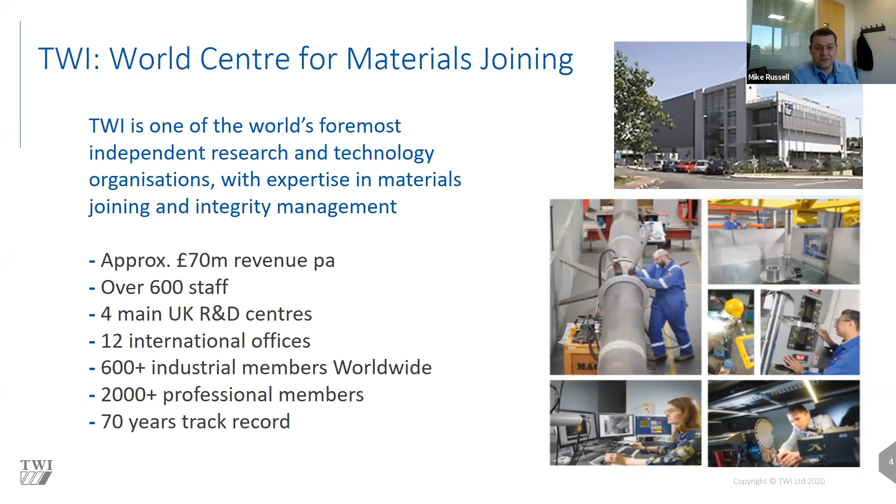Next slide, please, Jonathan. Thank you. So this slide summarizes our technical expertise across TWI. In the interests of time, I'm not going to read through all of these individual areas, but you will all receive a copy of this presentation, so feel free to have a look at this, and if you are interested in any of these areas, please get in touch.

So that's what we do. And next slide, please - that shows you who we do that for. So we are active across a wide range of industry sectors, and as you can appreciate from those images, lots of different engineering materials, different thicknesses, different scales of operation, different nations, territories, and companies. It's a very broad-based business.

Next slide, please. So friction stir welding will, of course, be familiar to many of you. I'm not going to talk through the process itself here today - if you would like more information about the base process, feel free to reach out to us or look at our website. The key point to pull out here is this technology was invented by TWI in 1991 and was actually in production use in industry within 5 years after invention. And that's quite a remarkable turnaround and implementation period for a brand new process.

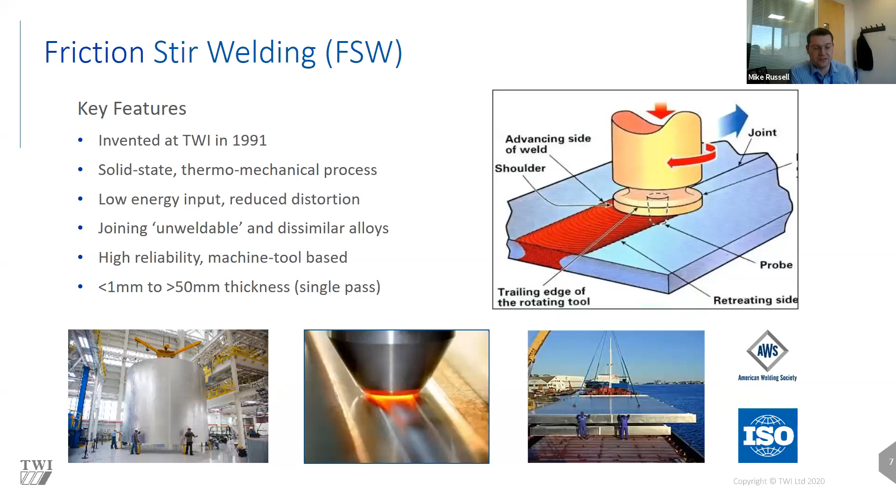Next slide, please. So one of the reasons for that really rapid uptake, and here we're talking predominantly about the aluminium market, was the combination of lower costs, higher quality, and improved speeds.

Friction stir welding as a technology is better, cheaper, and faster than the incumbent technology in that area. Now, you may well say, of course I would say that, I work for TWI, we invented the technology. But what you see on this slide are public domain quotes from companies who've used this technology in production, reporting cost savings, time savings, and quality benefits.

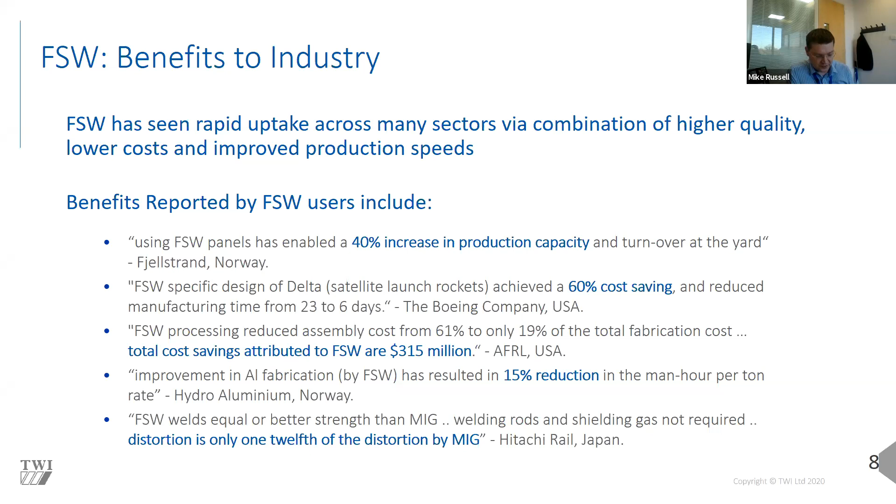In terms of the friction stir welding market, this is an analysis we undertook a few years ago, at the end of the friction stir welding license. Friction stir welding was a licensed process; the core technology is now free from patent, free for anyone to use. At the time that happened, we looked at the scale of the market overall, and we collected and calculated the value of that market and a number of key performance indicators.

At the time, we estimated that we had probably welded halfway around the world with friction stir welding, which is not bad going in 20 years since invention. We had saved enough energy to make 200 million cups of tea - a peculiarly English thing to refer energy savings to. And we had saved ourselves about 2,400 tons of CO2. You can probably add about 20% to those numbers to bring us up to date today.

That gives us an estimate of the market as it is today of about 50 million, and of course that is aluminium dominated as we sit here today. So the exciting potential for friction stir welding of steel is that the steel market itself is 30 times larger than that of the aluminium market, if you look at material production each year in the world.

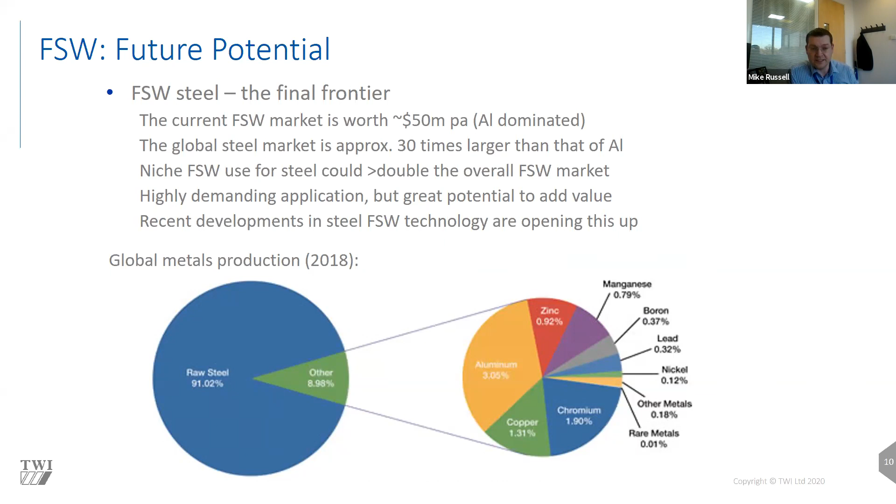The question, of course, that then comes is: why hasn't this happened yet? Why hasn't this market realized its potential? A key factor here, and indeed the key enabler, is the friction stir welding tool, and you're going to hear quite a lot about that today. The tool used for friction stir welding of steel obviously experiences a highly demanding environment, and that really requires leading edge materials expertise and understanding to be successful.

Friction stir welding of steel in the past has suffered from inconsistent tool performance, repeatability, and variability issues. What we're announcing today really is a step change in that position, with Element Six now moving into this area and providing a new and effective solution for this challenge. So we'll show you that in this talk, and I think you'll be excited by what you see. That's everything from me to start with. Thanks again, everyone, for being here and for your interest in this area. We look forward to talking to you and working with you in the future.

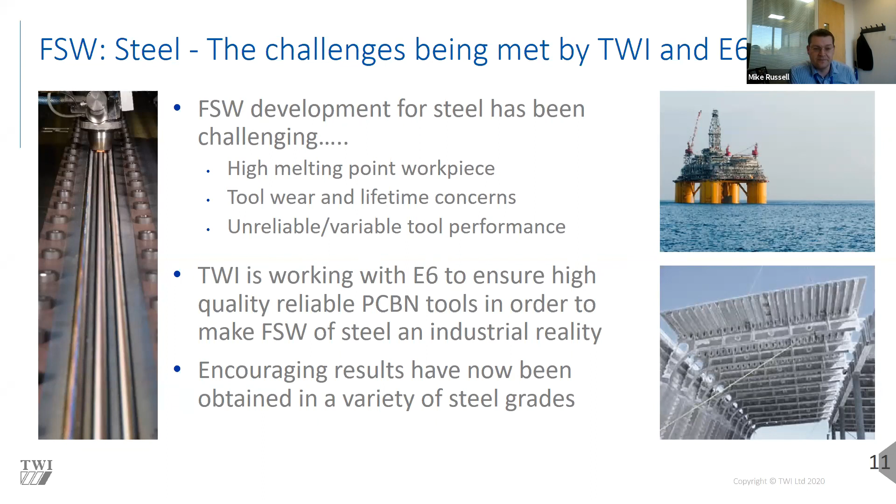I want to touch upon two things: one, to introduce Element Six, and two, to talk about some of our unique strengths that make Element Six an ideal partner to develop friction stir welding in steel applications. We are a subsidiary of De Beers, which is part of Anglo American, so we are proud to be part of a large organization. We've been providing synthetic diamond solutions to our customers for over 60 years, and our products find a wide variety of applications and end markets - oil and gas, aerospace, automotive, semiconductor, etc. We serve over 5,000 customers globally with a manufacturing footprint in 6 countries, and we are supported by a team of scientists at our Global Innovation Center near Oxford.

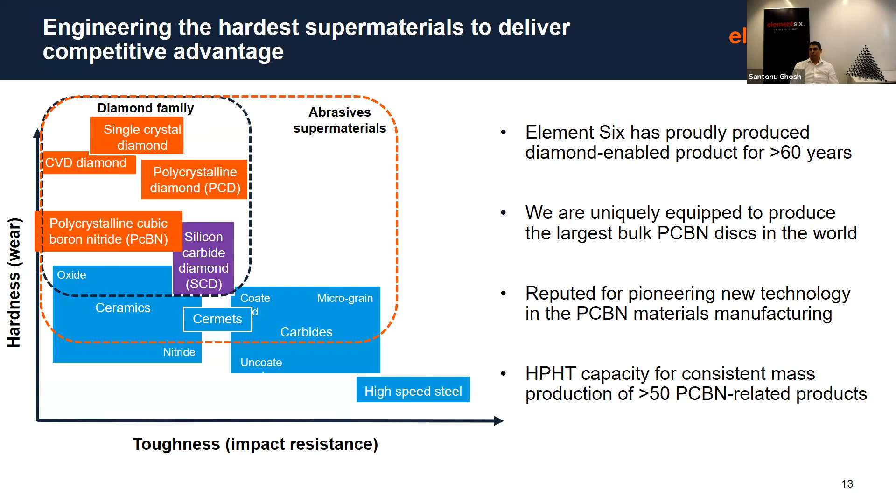So one of the key questions is, how are we able to make these tools reliable and provide a consistent result? So what's so special? What's the secret sauce? I'd say our knowledge of PCBN and working in close collaboration with TWI have been the two critical factors here.

And that has been ably supported by the focus of our colleagues in our innovation center. What we've done is we've looked at every aspect of PCBN production, from product design to raw material, to how we make it, to how we process it. And then we test, we take feedback, and then we make changes.

This has been going on for a period of time. So we've been on a collaborative journey with TWI. We feel good about the results that I think Jonathan is going to talk about. That's all for me.

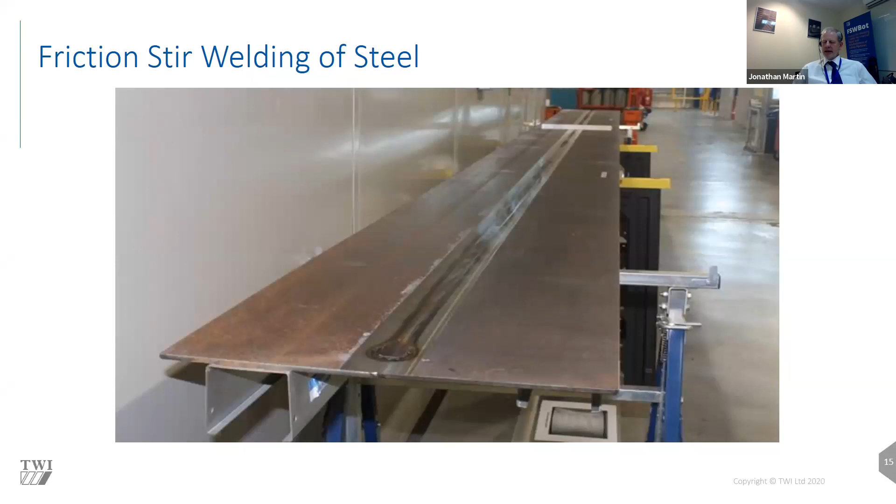Since that time, TWI, along with other practitioners of friction stir welding and research organizations, have been looking at joining steel. I don't think we've come across a steel that we can't join, ranging from carbon steels, construction steels, pipeline steels, steels used in shipbuilding, etc., along to the high carbon D2 content steels. A range of stainless steels, the austenitic 304, 316, through to the martensitic and duplex. And also we've welded some of the very difficult to weld steels, such as the precipitation hardened steels and the ODS, which are impossible to fusion weld.

And I think also with friction stir welding, it is possible to do some dissimilar joining. So this is an example of joining a carbon steel to a duplex steel.

And I think universally throughout all this work and through papers that have been published, the properties of these welds are universally accepted as very, very good. This is due to the wrought microstructure of the nugget itself. So there are reported increases in strength, fatigue properties, in toughness, etc. I think this is sort of universally known.

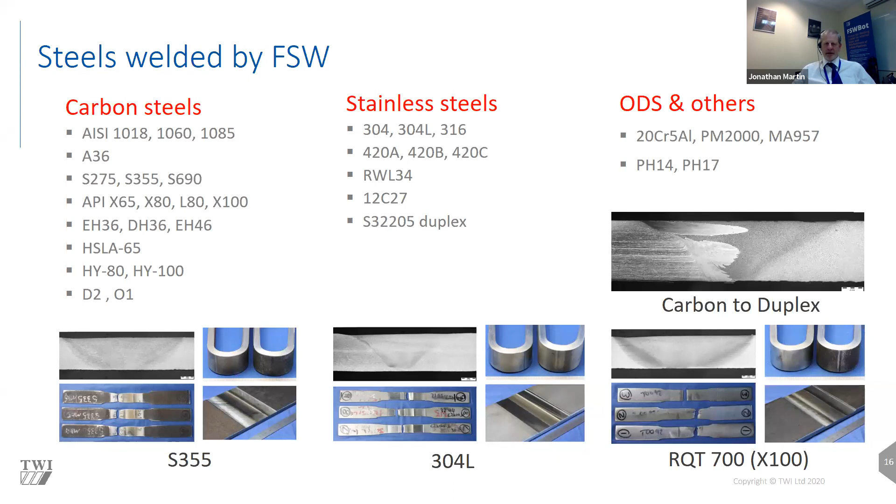But also, I think universally known is the issues of tool materials in terms of tool wear and consistency. And therefore, this is part of what we are looking at now in terms of trying to develop a tool that overcomes some of these problems in terms of providing a tool that is reliable and consistent.

So we have been working with E6, bringing together its expertise in PCBN materials processing, and TWI bringing its knowledge on friction stir welding. Over these 2 years, we've looked at different tool designs, tool holders, plunge cycles, pilot holes, tool wear assessments, and we've come to the position where we feel we can share these results with you and say that we believe we have found a tool material which is robust and consistent.

So we set about doing a sort of testing regime on these tools. In order to develop the testing regime, we need to decide what sort of applications these tools are going to be used for. As Mike was saying, it's a very harsh environment for these tools.

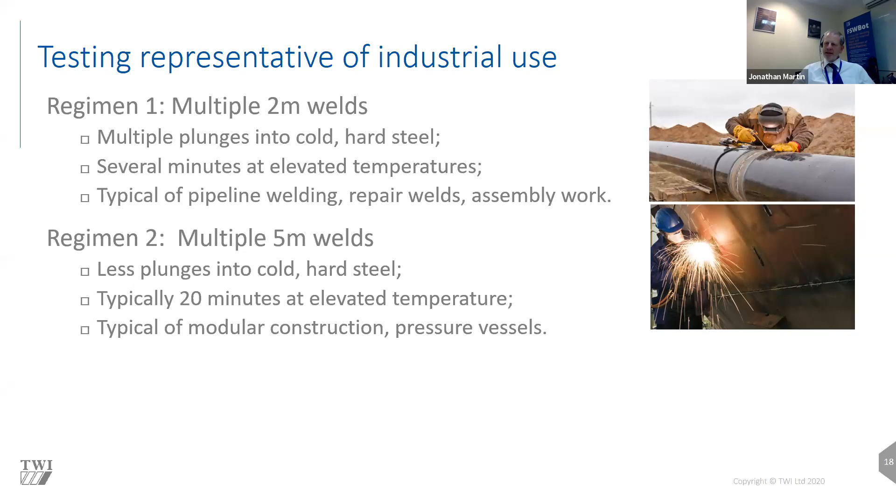They're sitting at elevated temperatures for many minutes, depending on the application. If you're looking at pipeline welding, you'd have multiple plunges and short duration welds, through to perhaps more the applications in the construction industry, where the welds will be slightly longer and therefore the plunge cycles will be less, leading through to really long welds used perhaps for panel building, for ships, etc. These welds may be 20 meters long, and therefore the tool in these cases will need to sit at these elevated temperatures for over an hour.

So in the test that I'm going to show you now, we looked at assessing regime 2. This is making multiple 5 meter long welds.

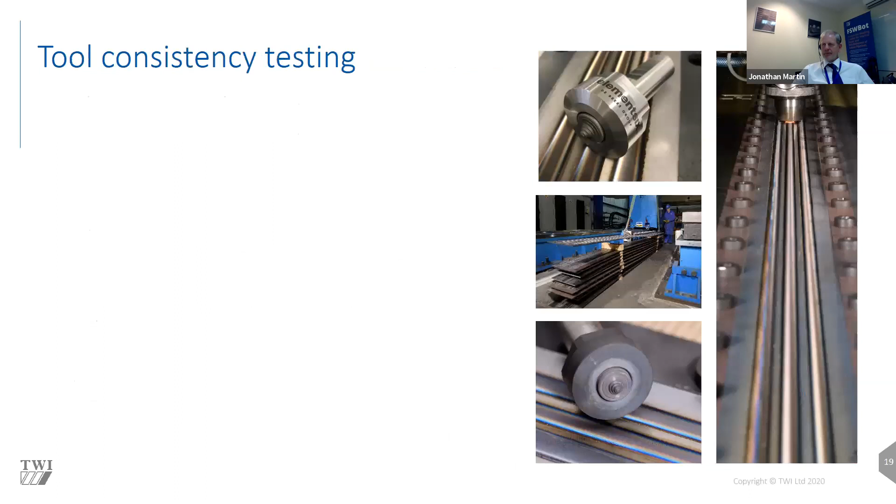So to do this, we selected 6 tools. These tools had a penetration of 6 millimeters. There were 2 tools taken from each of 3 different production batches, so these aren't from one batch. These batches were made over a period of time, but they were all subject to this very close, rigorous assessment.

The plate material that we welded was 8mm S355 steel, a low carbon steel, and we just took the mill scale off the top of these plates in order to reduce the number of variables, really, because we wanted to assess the tool material performance.

All the welds were made in position control. These were multiple 5 meter long bead on plate welds, and the target was to do 8, accumulating about 40 meters of weld on each tool.

The assessment was looking at the weld parameters, looking at the weld data logs, measuring the tool after each weld, taking a picture of the tool and assessing it for any potential damage. We then took a weld macro every weld, and then after 20 meters of weld, we took a more detailed scan of the tool. This was done by E6, and Santonu in his presentation after mine will show you some of that work.

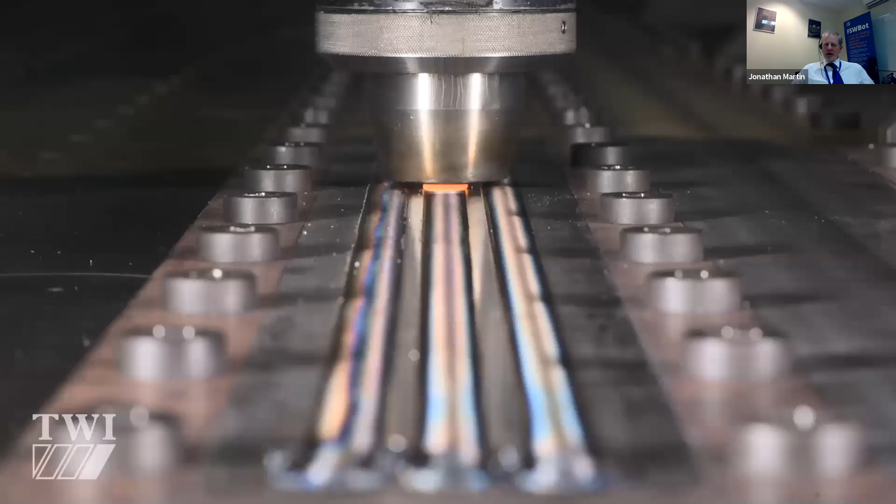So this is a video of one of these welds, one 5 meter long weld. I'll start this now. As you can see here, this is the material that we are welding. There are 3 welds, so on this video we're making the 3rd weld, and this is the tool here.

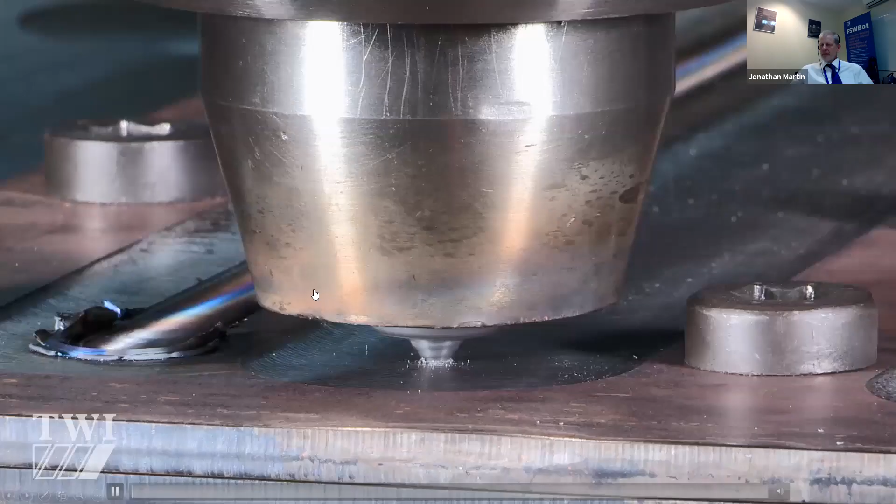This shows the tool being rotated and plunged into the material, heating the material up, getting it soft. The tool then transitions up the ramp phase, getting to full speed, to welding speed. We're welding here at 300 millimeters a minute, using an argon gas shield to protect the tool from oxidation.

So you can see here the weld is now complete after 5 meters. We also measured the width of the weld cap to ensure that we're getting full consolidation of the weld itself.

So as you can see here, these are all the plates that we welded. Each one of these plates contained 15 meters of weld, so we welded and welded. I think our operator Chris was just fed up with the size of these plates after a bit. So this is the tool after 40 meters of welding, and this is a new tool.

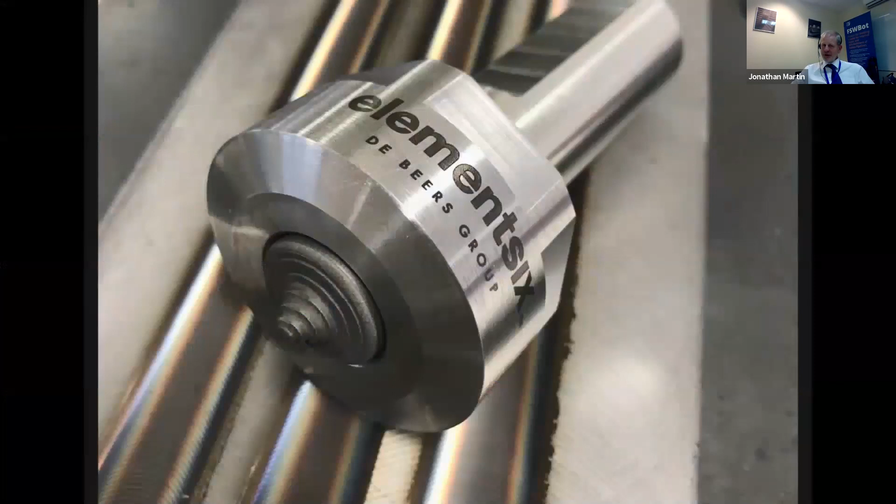It was done under great scrutiny, but it was pretty boring, which was good really, because nothing exciting happened. The tools performed extremely well.

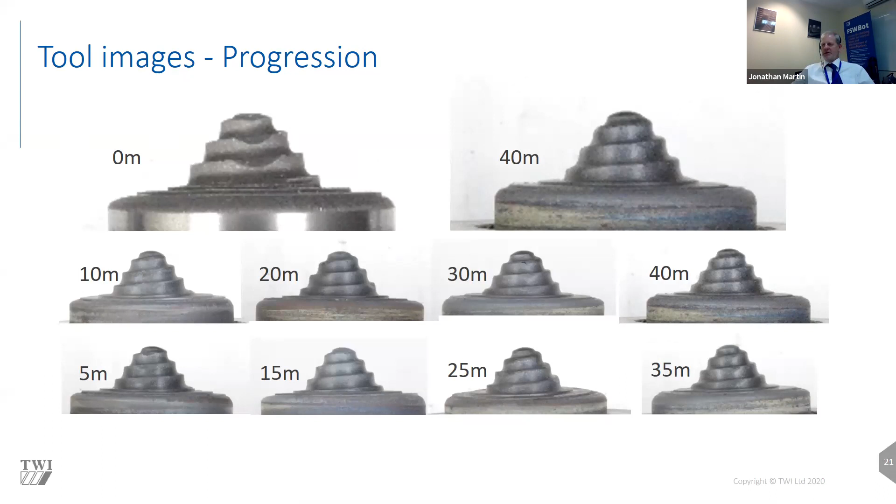I did mention that every weld, we took a picture of the tool. So this next slide is really showing that progression as the tool built up meters and meters of weld on itself. This is a picture of a new tool, and these are sequential photographs of the same tool after each 5 meter long weld. You can see here that there is a slight bit of wear, perhaps slightly on some of the crisper edges, just slightly rounded, but in essence, the form, the mixing capability of those tools remained.

We also took a macro from every 5 meters. This is just showing every 10 meters, so you can see in more detail what the weld nugget looks like - very typical of a friction stir weld. You can see the raw material of the plate around the nugget and the TMAZ.

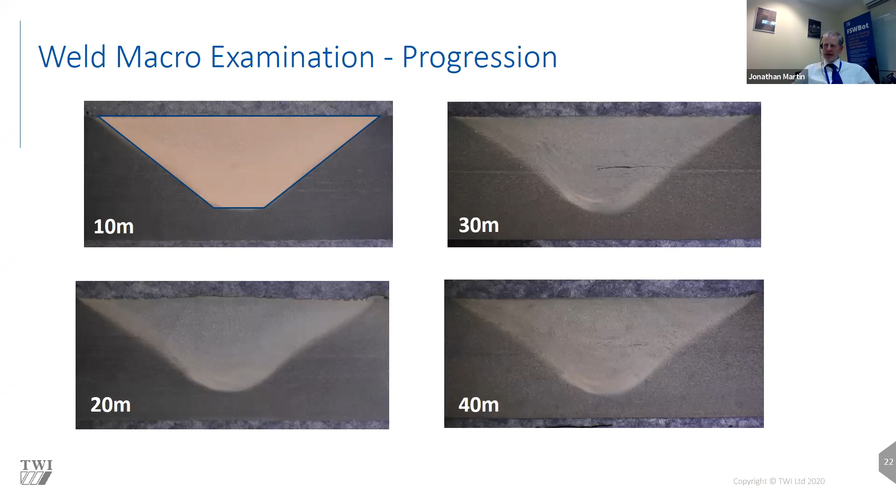So in order to try and quantify whether the tools are mixing the material similarly, we overlaid on this first one after 10 meters a shape that covered the nugget and the TMAZ. If you translate that and overlay it on all the other welds, you can see how consistent the shape of that weld was, which leads us to believe the consistency of mixing of these tools was very, very good.

So we did take some of these tools a little further, looking at whether these tools can do 40 meters. We have taken some of these tools and welded further, looking at force control, etc. But what we wanted to prove within this work was whether these tools are consistent. If you get consistent tools, you can then say these tools can be adopted by industry, and you can work out commercially whether it's viable to apply them to your particular application.

So all these 6 tools accumulated the 40 meters without failure. The welds were consistent, and we didn't see any flaws or defects in the weld that caused us any concern. The tool wear was consistent, and none of these tools failed during this testing regime.

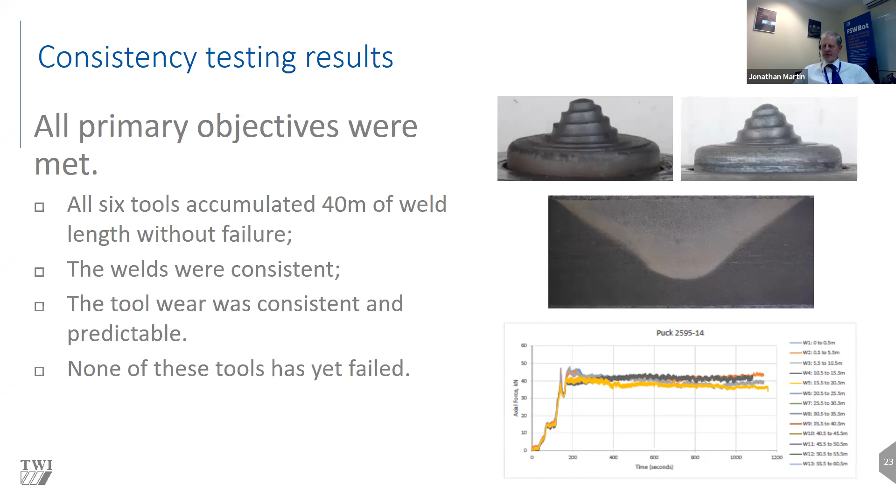Thanks, Jonathan. I'm Santonu Ghosh. I work for Element Six at the Innovation Center based in Harwell, Oxford. I develop new product and technology and have been doing it for some years. I'm pretty excited to talk about the work which we are currently doing.

Jonathan has already mentioned that we have been working on this development for some time now. The extensive trials aren't only about the long welding trials you've seen. We have carefully and painstakingly taken time to develop the material as well. As Mike and Jonathan have already articulated, consistency of the tools is very important in application, and also performance.

So we produced tools over more than 5 batches, not only during a small period of time, but spread over the year. We produced batches at different intervals and different times of the year. At Element Six, we do mass production of PCBN products, and we expect to see variations over a period rather than just synthesizing and preparing the tool in a week's time.

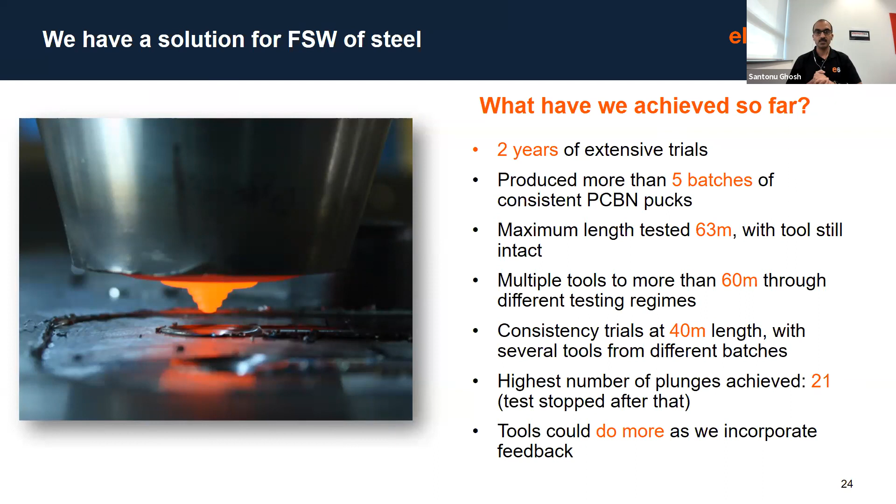Jonathan has shown the results he shared about the welding and how the macros, etc., look like. One of the slides you might have noticed, it was difficult to pick up the wear even after 40 meters. So we wanted to scrutinize the tool more than the optical images we had.

So we used a 3D microscope, an Alicona 3D imaging microscope, where we take 3D images after each 20-meter interval and overlap the images to find out the wear. On the left side image, what you see is a differential image after a tool has worn.

The pink areas show where we've seen more wear happening, understandably because of experiencing higher surface speeds. We also took the cross section to look at the profiles. On the right side, you're seeing the profiles from all 6 tools which Jonathan mentioned, and again it overlapped very well, demonstrating that the tool wear has been very steady and we didn't see much variation among the tools. So not only have the welds been good and very similar, we've also seen the tools behave very similarly as well.

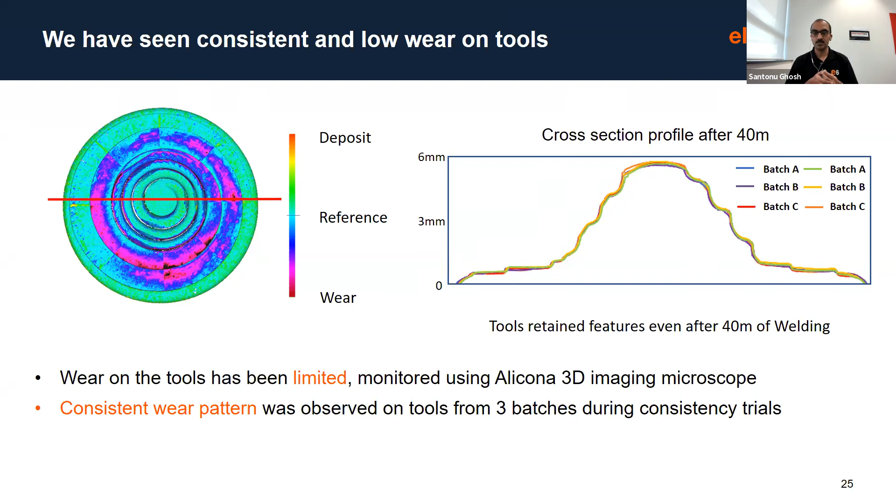So we have tested these tools beyond this consistency trial, at different traverse speeds, 0.1 to 0.3 meters per minute, under different conditions - whether it's position control or force control. We've already mentioned the plunging trials, done in different areas, different regimes. We've done it for a 20 meter stretch where the tool spends an hour at temperatures above 1,000 degrees. That actually helps us say that these tools are ready for where they could be applied. So if you have an application in mind, we would like to work in collaboration to develop this for your application, because there are a lot of levers we have, and we feel more confident that this could be done. Over to you, Nick.

That's great. Thank you, Santonu. Thank you very much, Jonathan, and everybody else.

So just to summarize where we've got to so far, I think we've demonstrated the friction stir welding of steel is now possible in a consistent and hopefully commercial way. It will give you the benefits of less distortion, a superior weld, and no consumables. TWI and E6 have demonstrated those reliable tools so far. Now there's quite a lot more work to do, and judging by the questions, I hope all the panelists are not going home tonight. We've had a lot of questions.

You're on mute, Jonathan. Don't do it, Jonathan. Okay, I'm here, I'm back in the room.

Yes, I think the work that I was describing was this consistency testing. So yes, we have tested these tools under lots of different regimes, from multiple plunges to 20-meter lengths. But these have been sort of individual tools, if you know what I mean. It wasn't systematic where we're looking at taking so many tools from so many different batches. Do you know what I mean? So yep, Santonu is right that we did test a lot of tools that I didn't report on, but what I was looking at and what I wanted to report was really that of the consistency.

This is where I feel it's very important in terms of getting this technology adopted by industry. People have to be confident that if they receive a tool, it will last - tool breakages, tool wear, etc. A lot of these components that are manufactured are high value, and therefore it's more important that the testing we did was just to demonstrate that there is a tool that can stand up to this, and we chose 40 meters as the cutoff. There was a lot of welding getting to that 40 meters, as you can imagine, and I would have loved to go on to 60, 80, 100 meters, but this was just not possible in terms of the resources. So we reached a point where we could quite clearly show the systematic testing of these tools to 40 meters, but we hadn't got this systematic approach for tools above 40 meters, but we have tested tools, as Santonu said, up to 63 meters.

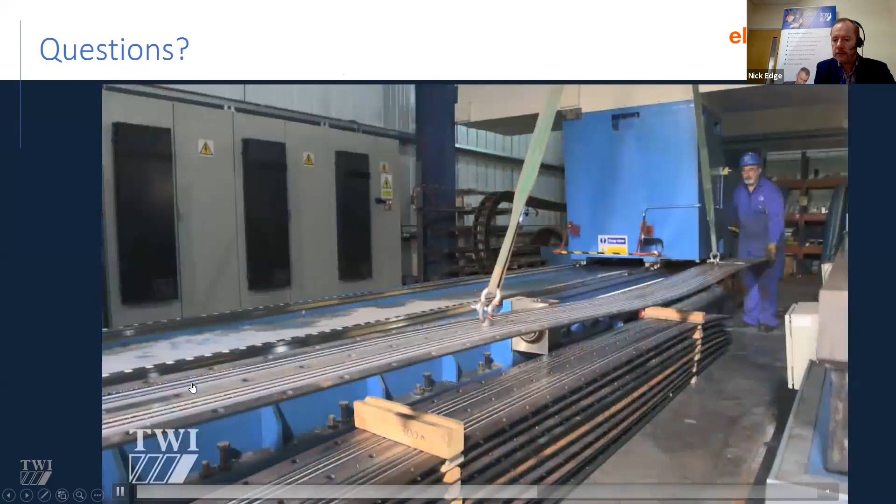Okay, thank you. Thanks, Jonathan. Mike, you mentioned friction stir welding patented - is this process for steel patented? Yeah, so the basic technology of friction stir welding is now out of patent and free for everyone to use. Okay, so you just need the best tools. That's all.

How thick can we weld? What have we gone up to? I've actually been specifically asked as well - can we do from 1 to 5 millimeters thick in stainless steel? Jonathan or Santonu?

The tools that we have been testing here are 6 millimeter. I think the second generation of tools that we are working on now, perhaps Santonu, you could comment on this, but are looking up to 12 millimeters. So in terms of going smaller, we don't see this as an issue. It is more in terms of depth, in terms of the stress and the strain on the tool. So tools less than 6 millimeters, obviously they need to be designed and manufactured, but that shouldn't hold too much fear.

It's really now taking it on from the 6 millimeter up to 12 millimeter, and I know some applications, particularly in pipelines, are looking at 3/4 inch, 19 mil. Do you know what I mean? So I think that's a good target to go up to. So the work that we have seen here is for 6 mil.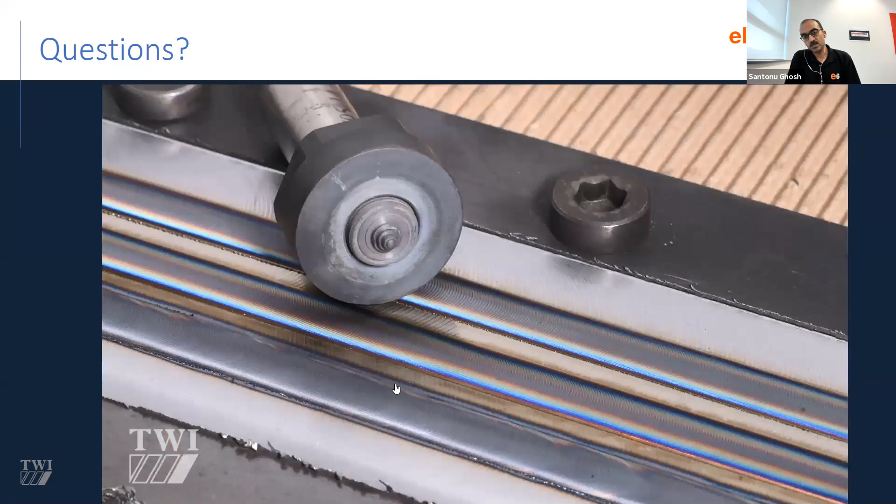Yeah, if I may add, Nick, on that point. So absolutely, we can go to a lower pin length. We are looking at different sizes in the development. And as Abhishek mentioned before, we have capability of producing larger PCBN parts here for tools. We could in future potentially explore that option as well. What are the larger thicknesses we could go?

Definitely our approach is to go step by step and make sure that we don't compromise any of the tool qualities and tool performances that we are talking about. So yeah, that's in pipeline.

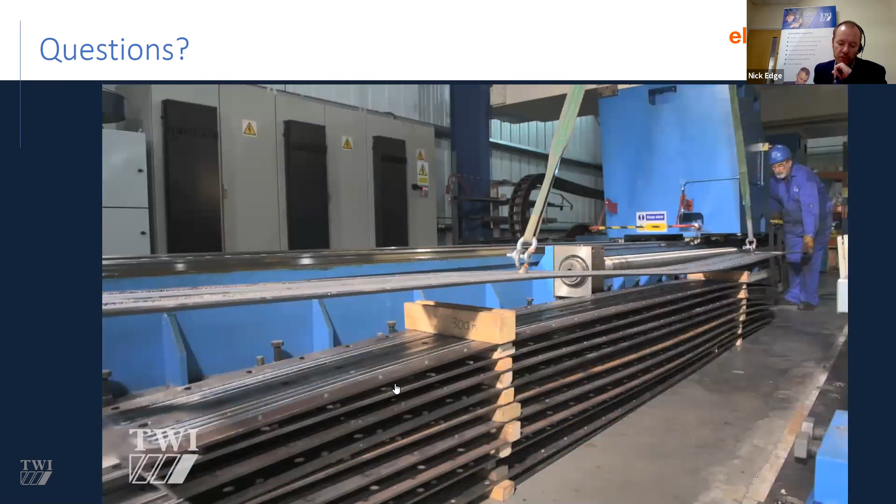Thanks. You mentioned pipeline, and Jonathan mentioned pipeline. A couple of questions about the geometry - what geometries can be welded, and specifically pipeline has actually been asked about by a number of people.

Well, typically friction stir welding of steel, at the moment, I would say mainly butt and lap welding. So fillet corner welding has not really been developed. This is being now looked at perhaps for aluminium, and as the tool material matures etc. for steel, this is an option then to transfer some of that technology or some of these techniques into steel.

With regard to pipeline, this should not be an issue. It's typically a circumferential weld, so this is a butt weld. Yep, pipe welding is not so much of a problem at all. Obviously, with pipe welding, it's really that is the support of the weld. So friction stir welding is a solid state, high force process, and in order to get a full penetration weld in a pipe, you have to then support the weld, which normally relies on an internal mandrel.

But yeah, this should not be a problem. Okay, and do we see any near-term applications that we can talk about at the moment? Anything that people, I mean, I guess pipe is one of them, but we are being asked a lot about, that we can mention? Who was asked?

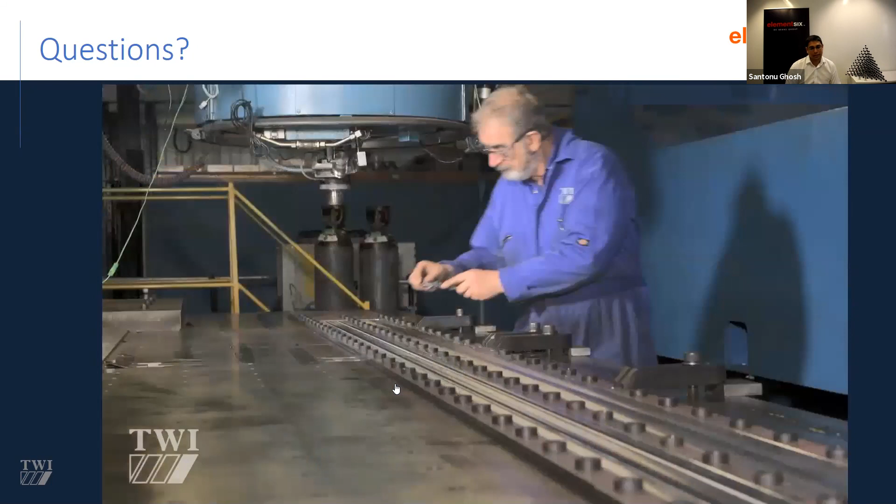Are they available at the moment? I think there is still work to be done. I'm not sure, Nick, if there was a question on price point. Sorry, yes, there was. I think, as you can all appreciate, it's early in the stage at the moment for us to get definitive around it.

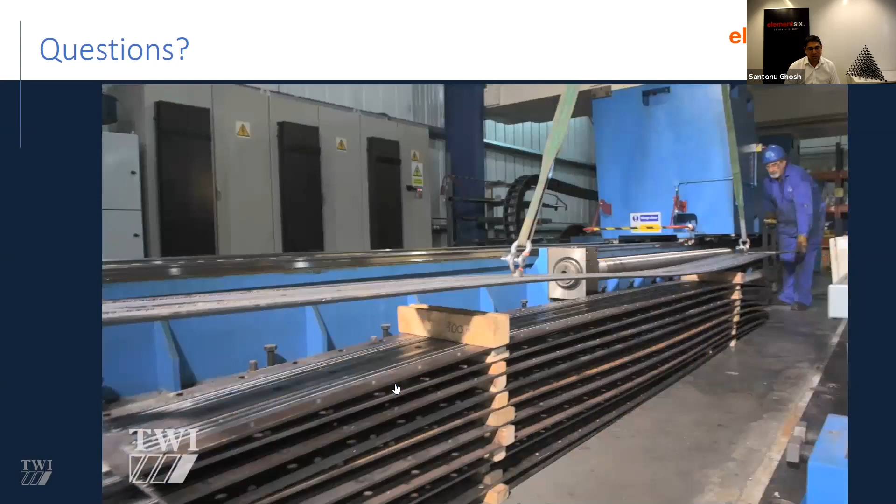If just to kind of focus our mind, order of magnitude, if you're aware of some of the previous cost points you've come across, keep that in mind. But the level of variation we can get to at this early stage could be high as well. So order of magnitude, think about what you've seen before, but there's still a lot of work to be done.

Jonathan, quite a lot of questions around the parameters. Could you share what you can about the parameters, the speed of the weld, what sort of forces we're seeing on these particular welds? Well, these welds, as I said, were made at 300 millimeters a minute. The rotation speed was 350 RPM, so it is a relatively low spindle speed.

The forces, perhaps for the eagle-eyed of you who saw one of the data plots, were around 40 kilonewtons, 43 kilonewton in terms of downforce. So it is slightly higher, I would say, than aluminium, but perhaps not too dissimilar to welding the very high strength 7,000 aluminium, just slightly higher. So these tools potentially can be used on existing friction stir welding machines. It's not a magnitude different.

I think applying these to milling machines would also be possible, but obviously the depth of the weld you can use these tools on will perhaps be limited to 2 or 3 millimeters. So the welding parameters are not vastly different, really, to aluminium, just slightly higher.

And were they all done at the same speed, all the tests that were asked? Yes. This was a consistency test, the whole purpose of these tests, so we went through the development process of looking at the weld parameters, which we haven't fully explored. So we chose a welding set: 300 millimeters a minute, 350 revs, and all those welds were run exactly the same, because it was really to test the tool material. We didn't want to add any variation. This is why we machined the surface off the plate, so that we are purely testing these, giving the same duty cycle, the same experience to all these tools.

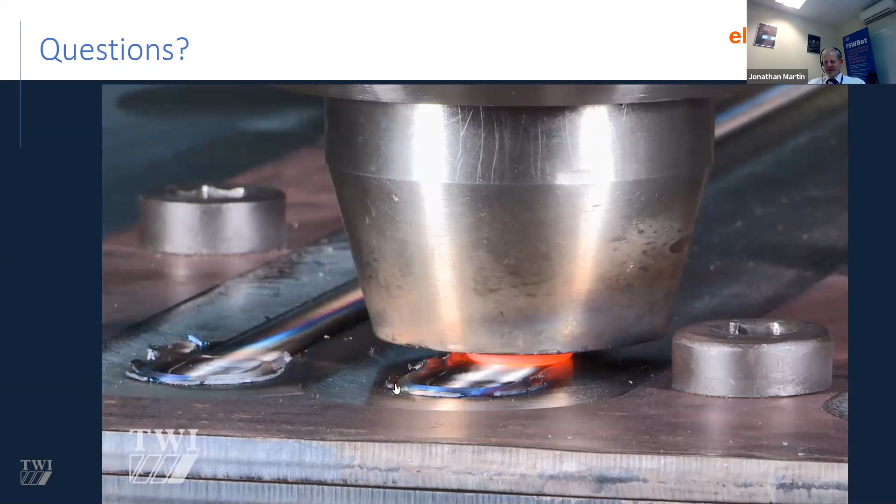So it got very boring, very monotonous, and Chris, who you saw in this video, and I haven't mentioned Steve Cater, who unfortunately can't be with us today, the team did an excellent job. It's a bit monotonous, not exciting, but consistency was the key to this. Ensuring that everything was the same, tool on tool, weld on weld, was very important.

Okay, thanks. Santonu and Jonathan, I guess probably Santonu first, there's quite a lot of questions about the image of the tool and whether or not it was cleaned off before measuring. If so, how was it cleaned off? And do you think the tool can leave contamination in the weld at all?

Well, if the question is related to the wear measurements, the one interesting part we noticed is that there is no lot of steel adherence on the tool, even with the longer length. So we didn't clean these tools with any kind of special cleaning technique to remove the steel or any other part, which is mostly steel adhering to the surface. However, we cleaned it to the level where the optical imaging is possible. So we kept the tool intact.

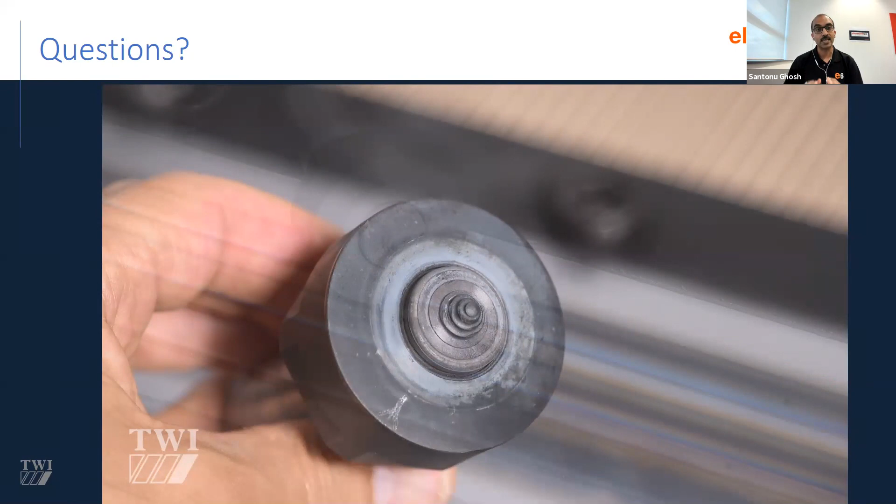Okay, thank you. Quite a lot of questions about the actual makeup of the tool. I think one or two people want to know exactly how you make it, Santonu. Could you describe again a little bit about the material that's actually used?

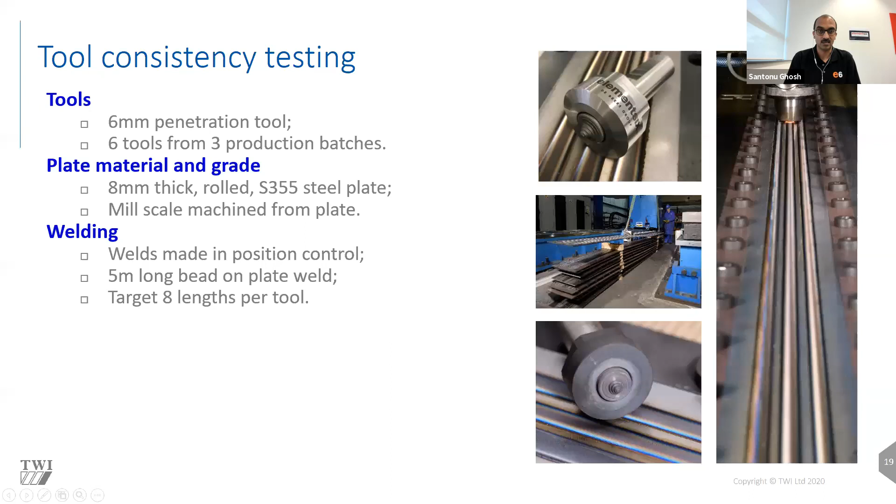So PCBN, polycrystalline cubic boron nitride, is a composite ceramic. You have CBN, and then you have the binder phase, as we call it. There are two broad categories of PCBN: low content PCBN, where the CBN content is around 40 to 70%, and high content PCBN, where the CBN content increases from 70 to 90%.

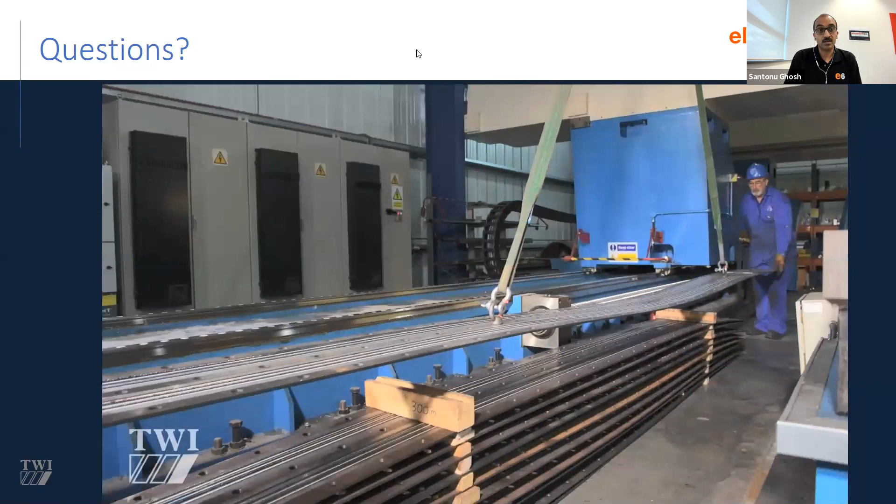The binders, as Abhishek mentioned, we have a lot in the product range, and we play around with the binders quite a bit. In this case specifically, our target was to make a PCBN which has very good high temperature properties. We chose the material such a way, and also the toughness wise, it's better, so that it can withstand the harsh impact of a plunge.

Okay, thank you. Quick question on the 40-meter welds that people have seen. How many plunges did we do across those 40 meters? And did we pre-drill the plunge?

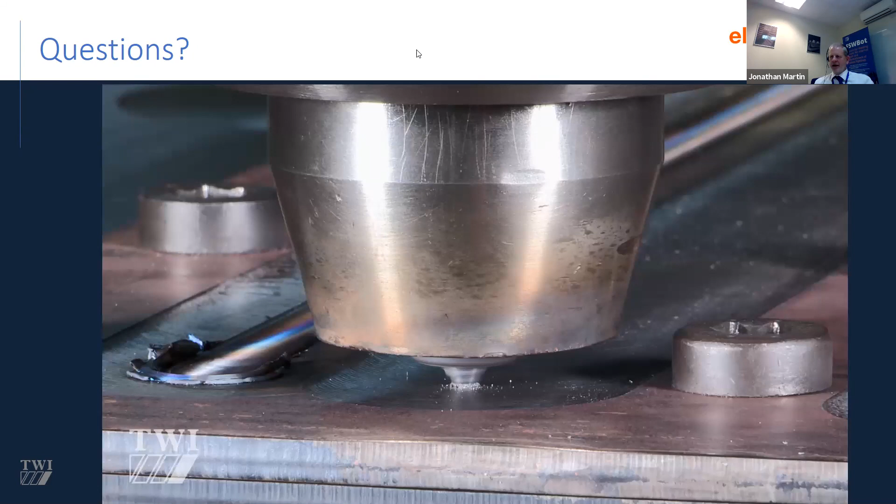So there were 8 plunges and 8 5-meter welds. Yes, there is a small pilot hole that we use in order to plunge the tool into. This was mainly to stop the material coming out of the workpiece causing problems with the tool. We think that perhaps we can eliminate the need for the pilot hole, but we didn't want to change the tool design at the time, so we drilled a very small diameter pilot hole that the tool then plunged into. So each of these 40-meter welds had 8 plunges and 8 5-meter long welds.

And just to raise another point, in this trial, the results you're seeing, we made pilot holes as Jonathan was mentioning. We did test this tool without a pilot hole too, but since in this case we just wanted to keep everything constant, all these runs had the pilot holes.

Okay, thank you. A lot of questions about the thickness and how thick we can go, which we've answered. But I think people will be very interested, Santonu and Jonathan, in developing a thicker capability. If I make one request: if you have any application, maybe a pipeline, where you want to test this tool on thicker plates, please get in touch with us or TWI, and we can work in collaboration on that.

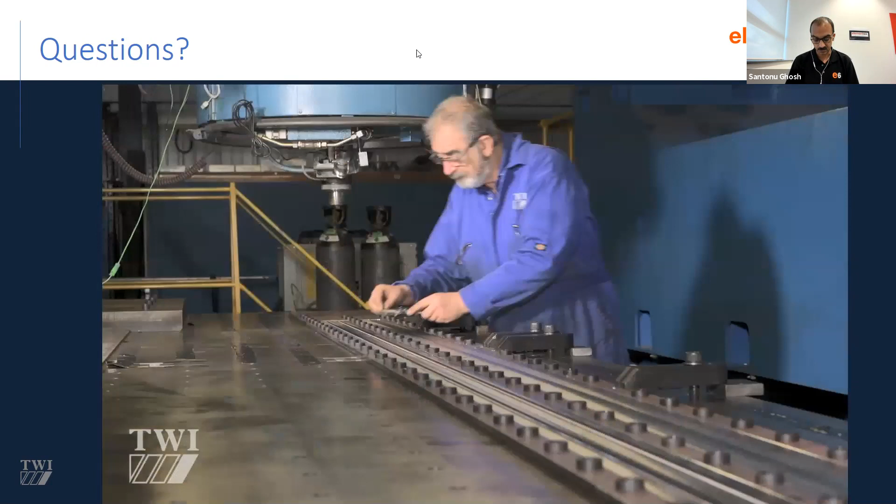Okay, thanks. Question from Nikki: what are the NDT capabilities for friction stir welding of steel, and is it relatively accurate? I guess that's probably for Jonathan.

Yeah, obviously NDT is used. We haven't done that much on steel, but I would imagine the NDT techniques for inspecting aluminium are reasonably well developed now in terms of phased array, etc. So the form of the weld we're producing in steel will be subject to the same sort of flaws you'd see in aluminium, perhaps voids or lack of penetration. The type of defects we potentially need to assess and test for will be very similar, so the techniques developed for friction stir welding of aluminium, we would anticipate, would read across.

Okay, and that leads me to the question: what are the next stages for this development? What are we going to do next after we've proved the consistency of these tools between E6 and TWI? What do we intend to develop next?

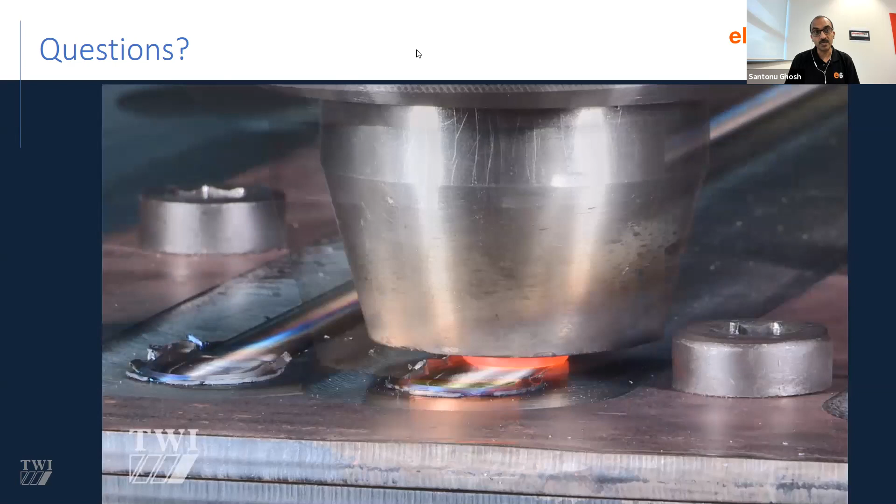I'll probably go first in terms of the tool. As Jonathan just mentioned, there are a lot of other exciting things we want to try with the tool. Design is one aspect. We want to increase the sizes, and going to the atmosphere point, we want to test these tools underwater, and in different conditions and atmospheres in which this tool will be applied. So yeah, there's a lot in the pipeline in terms of development.

Jonathan, you'd like to add anything? Yeah, I think we'll be very interested to hear from the people on this webinar where they think these tools could be introduced and developed.

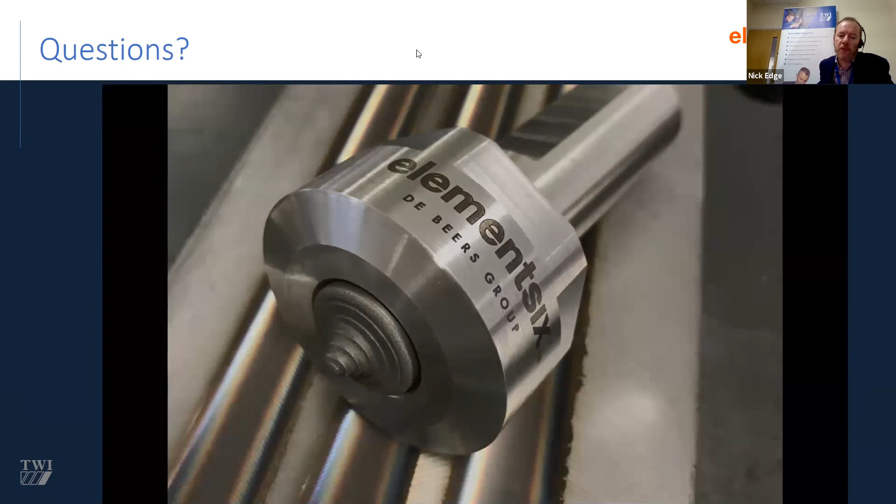I think we have our own ideas in terms of potential applications for the tools, but we would love to hear from people who have an interest or applications, and this may steer where this development goes. Obviously, this is market driven. If there's interest in a particular area, thickness, or alloy grade, I'm sure this may colour where the research needs to go. So getting industrial feedback on the work we've done is very important. You'll see the next developments will be more product specific as we go.

Yes, the machine we used here is a very large machine. This work was done in the Technology Centre up in Sheffield, where we have quite a broad range of capacity of equipment. This machine is our PowerStir machine, used for welding very thick material, so we can weld up to around 75 millimeters in aluminium in one go. We also have a 3D robot for making 3D components, and a smaller research machine. In order to assess these tools we wanted to do these 5-meter long welds, so we put them on the PowerStir, but in no way do you need a machine like the PowerStir to make these welds.

As I was saying, the forces we see here - the 40 kilonewtons downforce, the rotation, and the welding force of about 10 kilonewtons - these aren't big forces. So when people come to our facility and look at the PowerStir, they think, wow. But this machine has really been designed to try to be everything to everybody in terms of what we can put on it. Most friction stir welders operate within this sort of range.

Potentially you could look to putting this onto more milling machine type applications. I think the issue where steel differs from aluminium is perhaps heat management a little more, in terms of ensuring the tool is cooled, both to protect the tool and the spindle bearings, and also perhaps considerations for gas shielding to provide an inert atmosphere for the welding. But the forces here aren't anything like a magnitude of scale bigger than anything else you see with aluminium.

Question from me is how do people get involved? If they want to know more, or want to do some work with us, do they call E6 and buy a tool? How do we move forward? Santonu and Jonathan, I guess Jonathan.

Yes, we're very interested to hear from you in terms of your thoughts on this. There are email addresses that Nick put up for contacting us. As I say, we've demonstrated consistency, and I think what we'd like to do now is work with individual companies to roll this technology and these tools out. As we engage, we'd like to ensure the tools and how you use them are fully covered, so that when these tools are supplied to you, welding parameters are also given so you can operate them effectively.

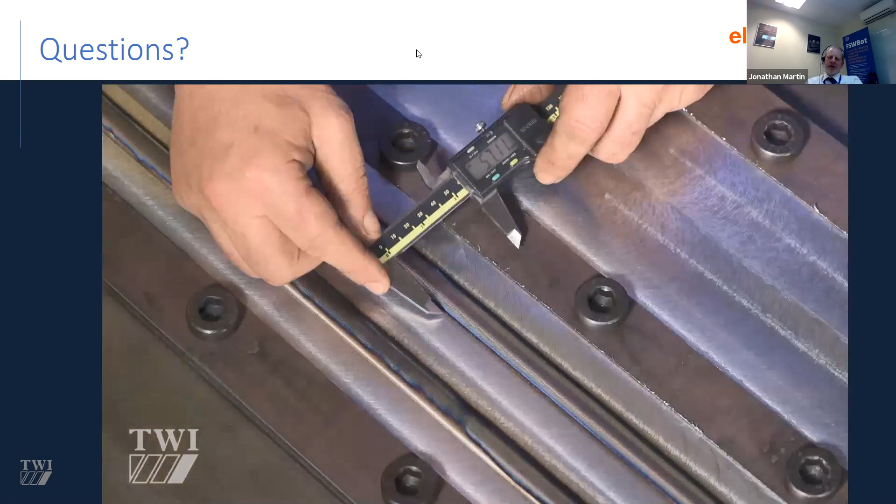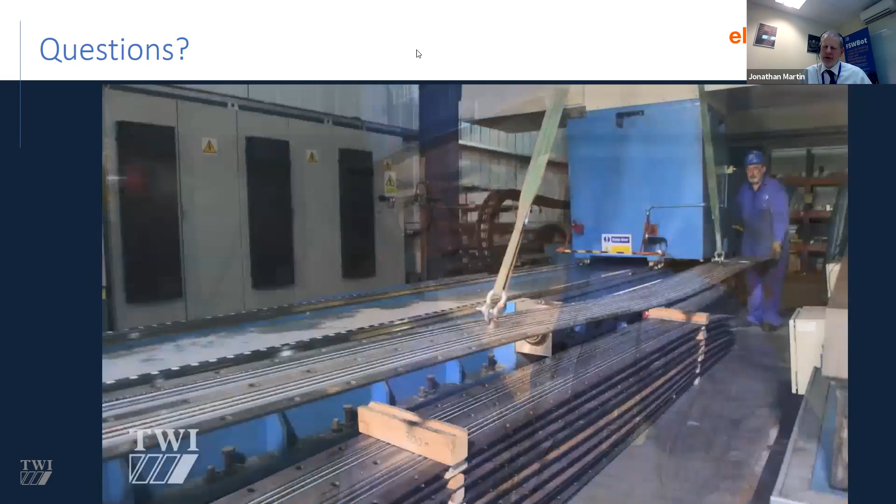There are no standards per se for steel at the moment. There are standards for friction stir welding relating to aluminium, such as ISO 25239 and the American D17.3. We've been working with Lloyd's, looking at guidelines which hopefully will be adopted for rules, and then leading on from that to perhaps more standards. There is talk - I'm involved with some of the Standard Commission on Friction Stir Welding - that there has been talk about doing one for steel.

I think the issue has been that friction stir welding isn't extensively used in industry at the moment, so why create a standard? Hopefully this breakthrough will see friction stir welding applied and used by industry, and therefore there will be a driver to create standards to run these welds against.

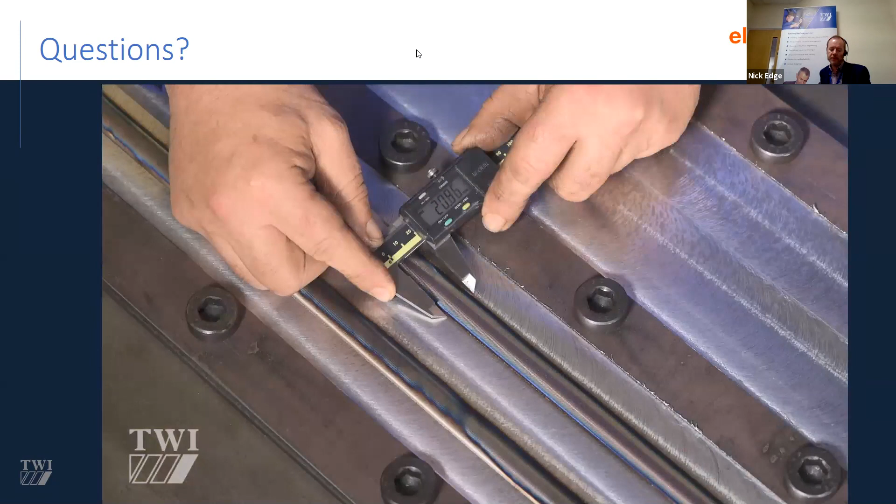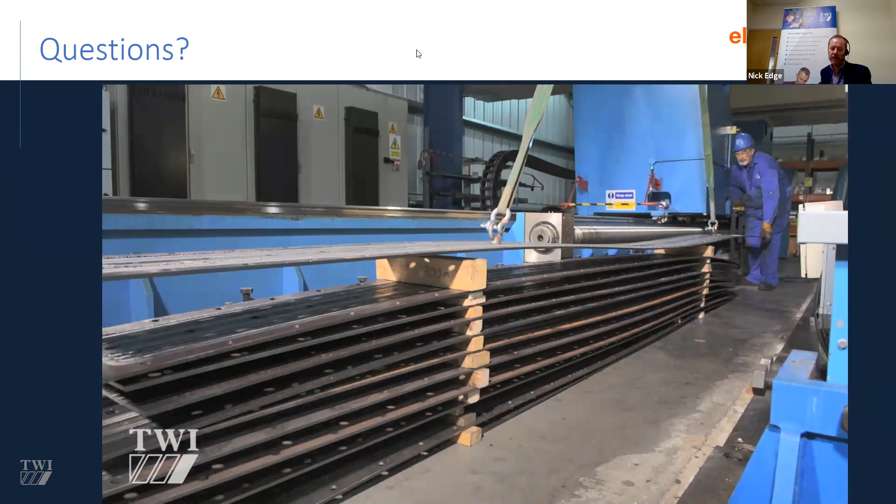Okay, one more question before we wrap up. A lot of people have asked about using these tools on other materials besides steel. We've talked about stainless, but what about getting better tool life in aluminium, welding copper, etc.? Do we think these tools will have a life beyond just steel?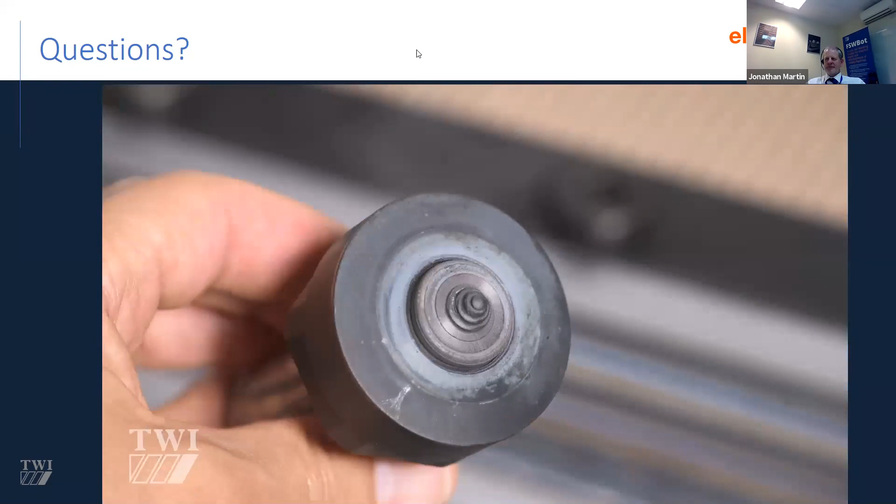For aluminium, there are lots of different materials that could be used. I'm not so sure whether PCBN would offer the right cost balance between tool cost and tool life for aluminium. I'm not so sure. Jonathan, you pretty much summarized it.

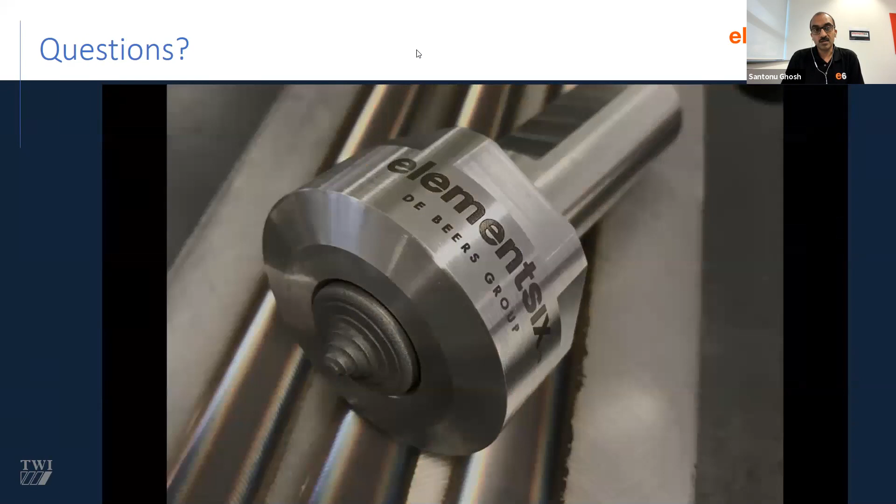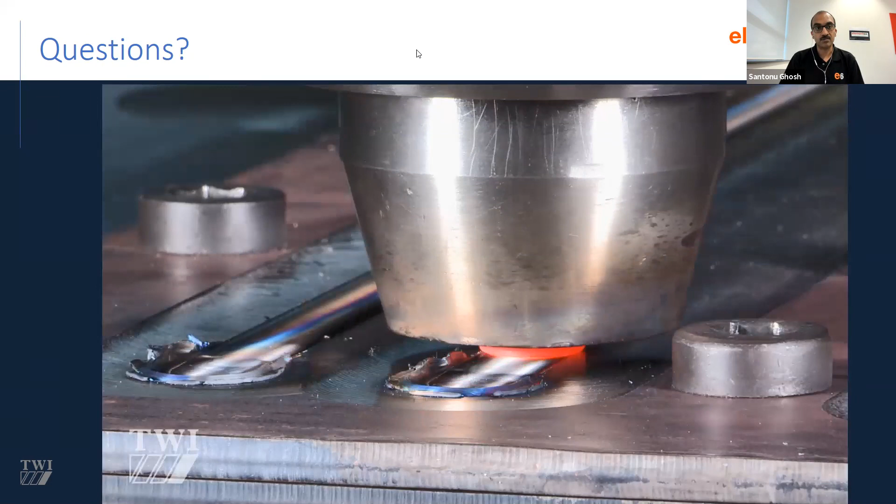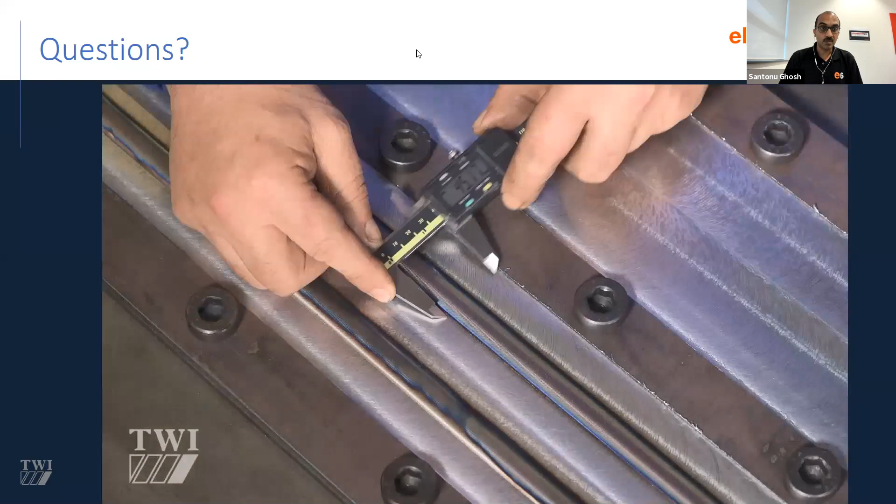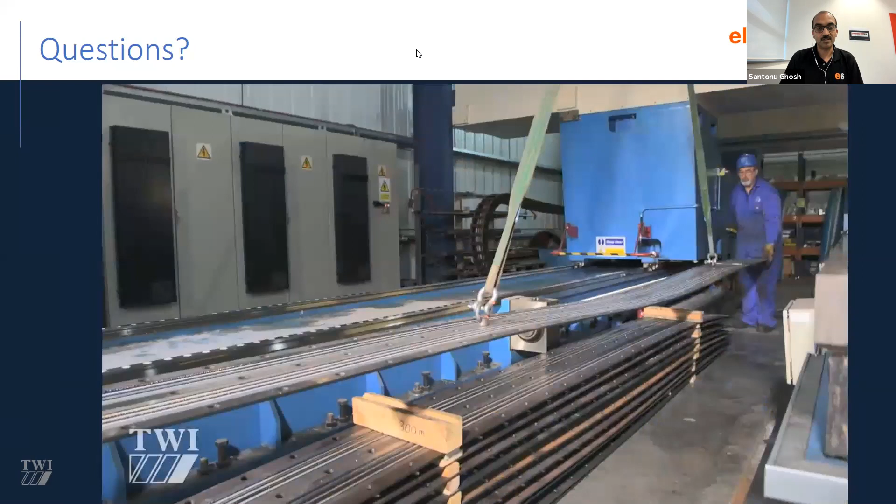There are a couple of points I'd like to add. If you look at the literature, PCBN has been tried on different metals. However, what we want is to make sure these tools are successful in application. For any application—copper or other metals—you'd need to investigate further. At this moment, the tools we're using we believe are good for steel; we haven't tested this tool on other materials. Our answer would be: please get in touch and have a discussion. We could have a longer conversation than the minute I have left.

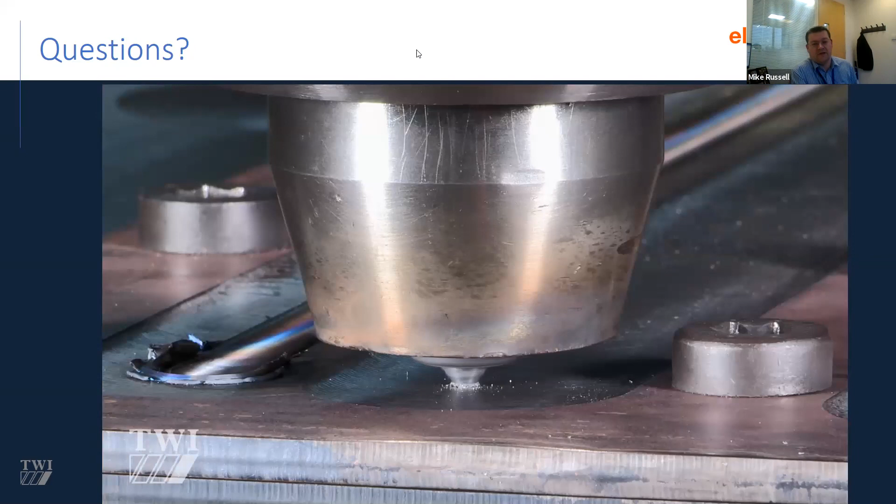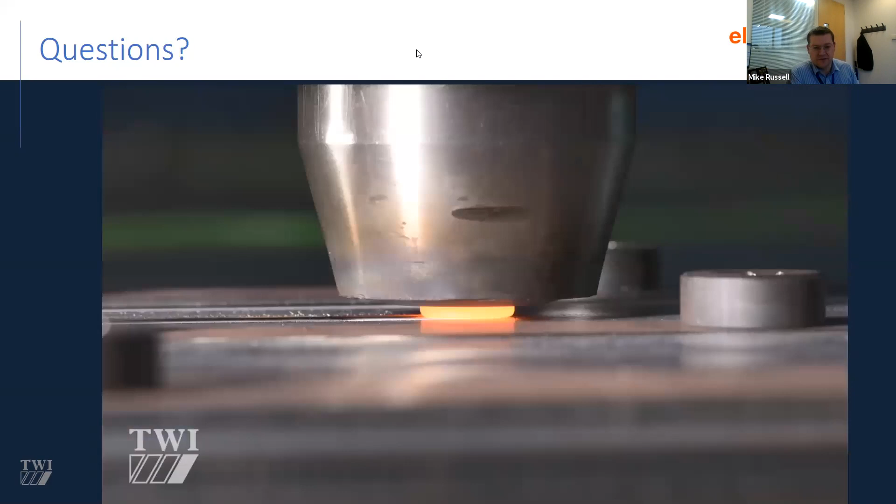Thanks, Nick, and thanks everyone. I think this webinar today, the number of participants, and the great number of really good questions underline the interest in this area and the potential for growth. It's a really exciting step up in this technology, and we look forward to seeing it applied across the board.

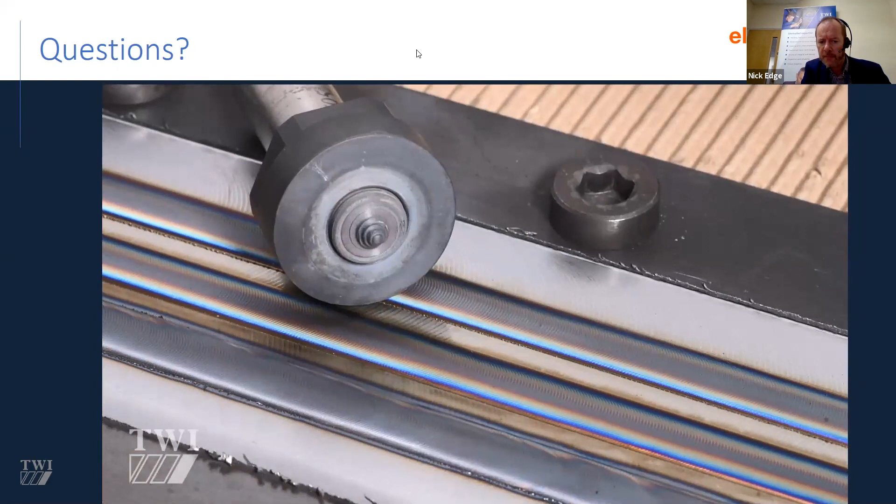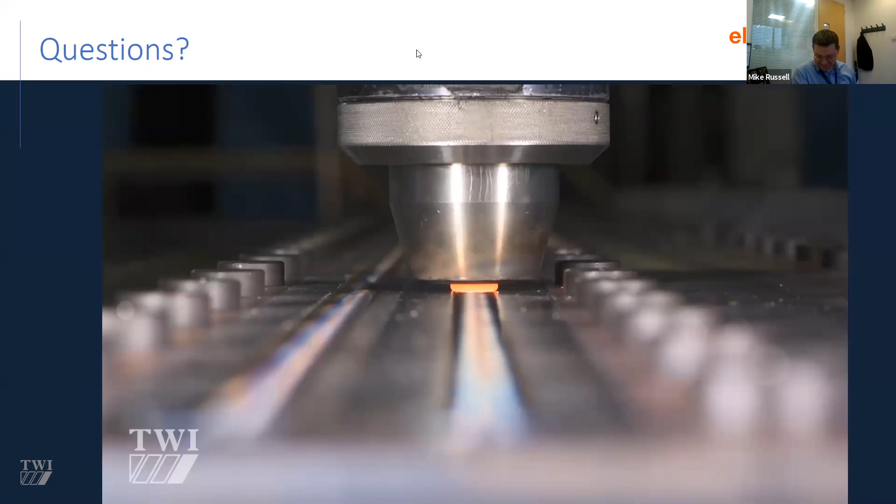I just want to say, whatever plans you've got for the weekend, even during lockdown, Santonu and Jonathan, you need to cancel them because you've got over 100 questions to answer. It's going to be a busy 24 hours.

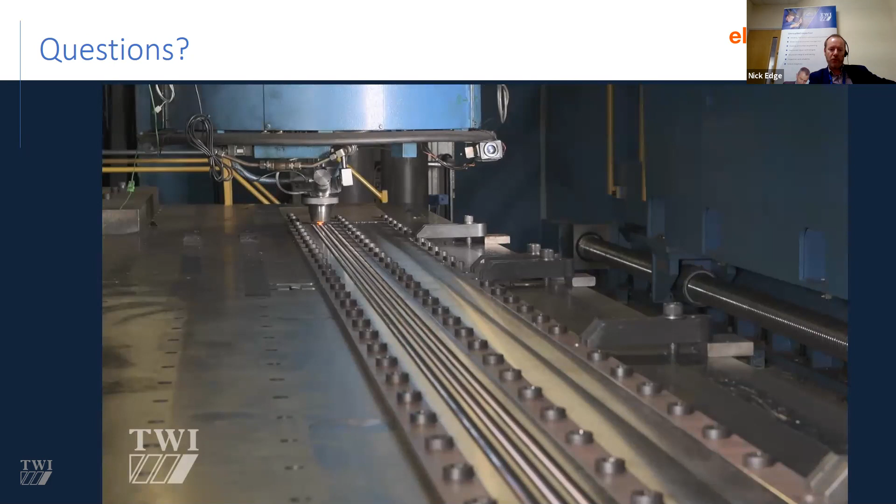And I'm not qualified, so that was terrific. Thank you, guys, and I wish you all well. Stay safe, everybody. There are more questions than we can answer today, but we will get back to everybody who has asked questions, and we look forward to working with you in the future. Thank you very much. Thanks, bye, thanks.